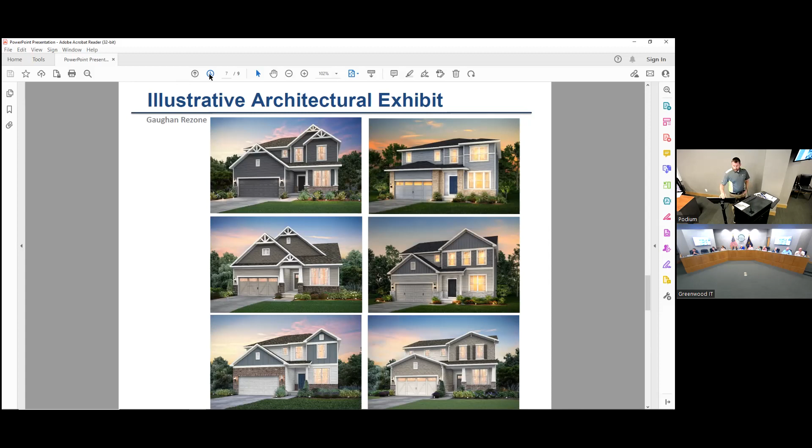The need for that design needed additional right-of-way from the McManuses. So we met with them, we've talked with them a handful of times, and had collectively determined that that's not the design that they wanted us to move forward with. So we spent some time trying to figure out what road improvements would look like if we didn't do that taper with the right-hand turn.

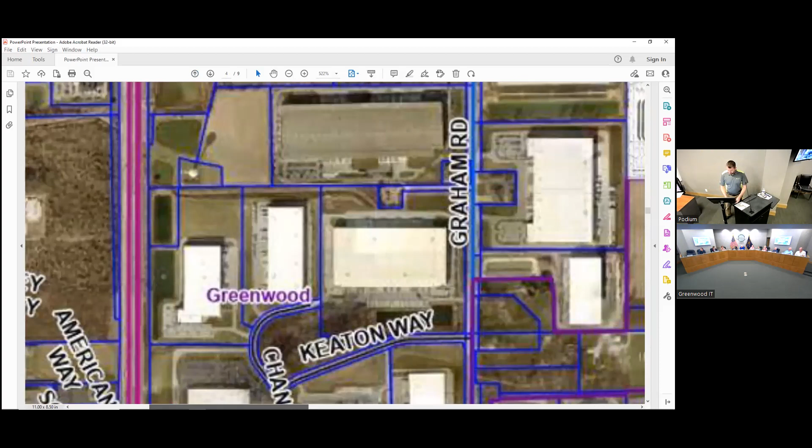So as you're coming northbound from Main Street, you would have one lane going northbound, which is typical what it is today. And then you'd have that, as I described earlier, that taper and then the deceleration lane to make a right-hand turn. You'd have that design aspect south of the Sagebriar entrance. And then coming out of the Sagebriar development to go northbound, instead of just having an angled taper, which is kind of just a triangular shape, essentially the additional pavement needed to carry that passing blister, that through traffic around, that's creating that second lane.

So to the south of the development, you'd have the two lanes continuing to go south that would funnel back into one. And then as you're going northbound, it would be a single lane with a dedicated right-hand turn.

So it's not a second through lane, it's an extension of that right turn lane into the Del Webb Sagebriar development. It's the right turn lane, and then our typical entrance standard requires a deceleration or acceleration taper when you come out of the development. And that kind of ran together, not very cleanly, with the passing blisters for the Gaughan development. So we ran it together as one big lane and basically just extended that taper out further.

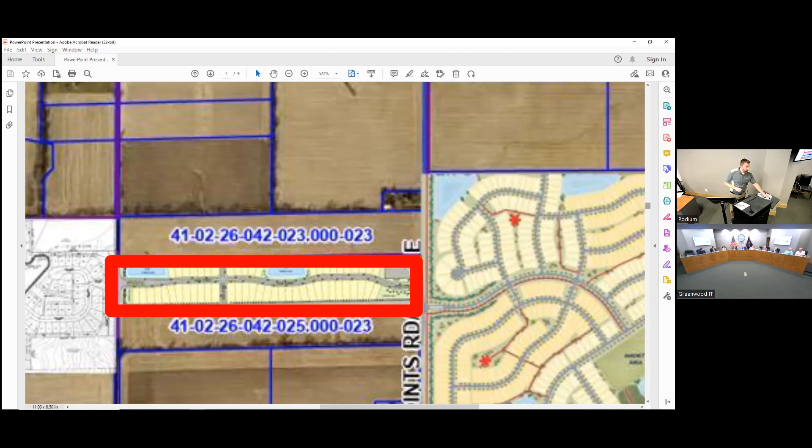I mean, to me, that's providing a bottleneck of traffic, huh? I don't think it will, because as you're coming northbound on 5 Points, there'll be a taper to get to Sagebriar, there'll be the right turn lane, and there'll be whatever the difference is between Sagebriar and Gaughan - I don't know offhand, maybe 200 something feet - and then the taper back to one lane of traffic. So there's no reason for through traffic to get into that outside lane unless they're passing a left turning vehicle or turning right to Sagebriar.

This is somewhat of a similar traffic situation as we have on Sheek Road in a few places. I can't think of any exact locations off the top of my head, but I'm sure other locations exist. Basically, our minimum entrance requirements would have kind of bled together into one, so we could clean it up somewhat.

Is there an issue with Sagebriar and the Gaughan properties not aligning? I think in an ideal world, they would align, or they'd be farther apart. I think with this proposed lane configuration, we kind of relieve those concerns. Because there's space to get around those left turning vehicles.

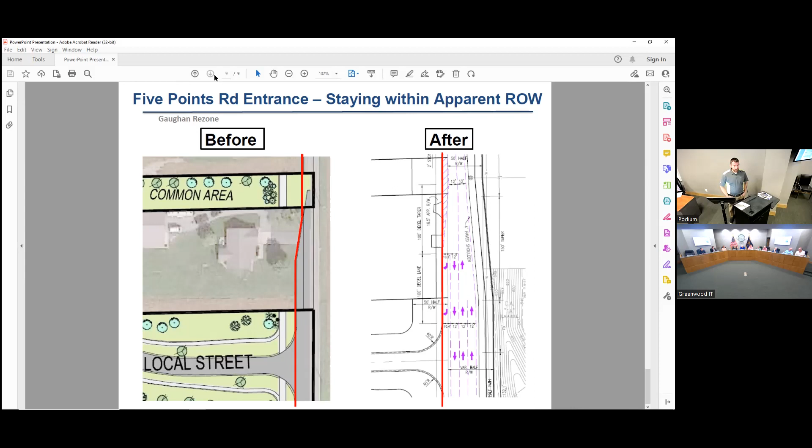That was my question. I noticed the development appears to be kind of in the middle of the field. I didn't know why that wouldn't be aligned with that other subdivision across the road. Maybe it's probably owned by different people. My understanding is they've been unable to acquire either parcel on the other side of that. Correct. So we call them the rectangular, or shotgun, long skinny rectangular tracks - there's three of them that were broken up.

Due to the cutout of the home that the McManuses live in, we can't really push it any further north. The entrance - we've tried to acquire the property both to the north and to the south, and for a variety of different reasons, it's not working out. So we did provide connectivity substreets to them if and when they do develop, but directly, there's no more space.

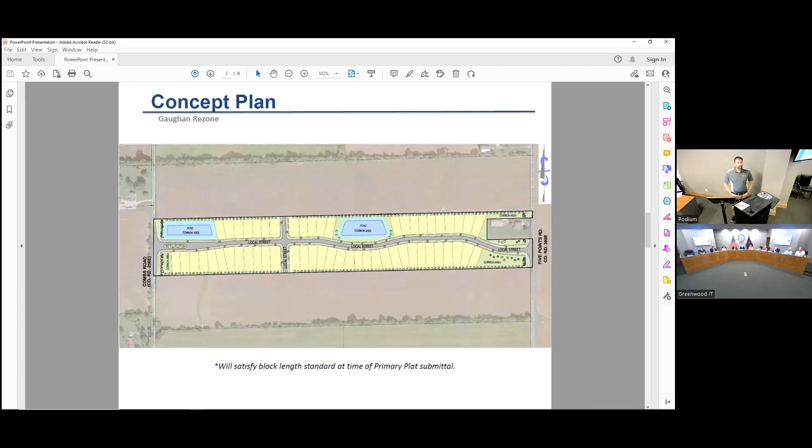So sewer is actually being brought over for Sagebriar through Ridgetop, which is the white development on the west side of Combs Road, through this development to get to 5 Points, ultimately east to 5 Points. So that's all a gravity sanitary sewer line. And then water is coming up 5 Points, and I fully expect that we would have to get that looped all the way through back to Combs Road.

So the project is somewhat of a necessity to keep utilities and extend them - you propose a subdivision and offset the cost that the utilities would make to pay. I wouldn't necessarily say it's a necessity, but we think it's a benefit to the city to be able to provide an extension of the gravity sewer, but then also closing the loop on the water just to make sure there's sufficient pressure. So you're improving utilities in the whole area. Yes, sir. Thank you.

Anybody else? Accept a motion.

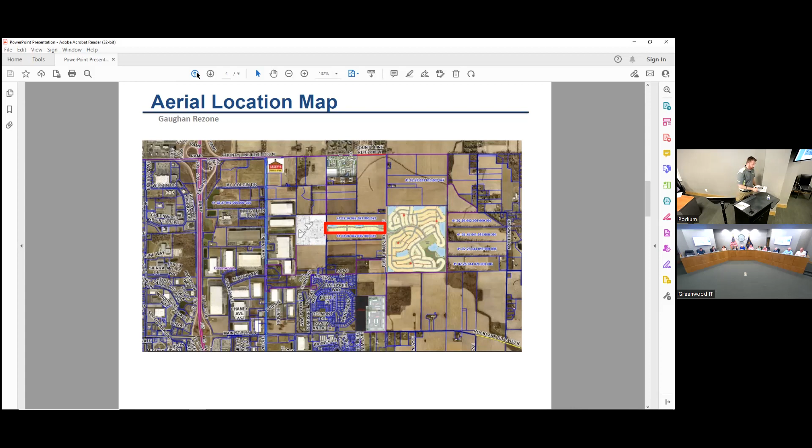Is there any old business from the floor? Seeing none. New business. Only new business that's on the agenda has been continued to August 28th. There is a waiver as well. Have a waiver? Oh, well, yeah, that's next on the agenda. Yes, you said the only other new business. Oh, perfect.

Other new business, PC 2023-042, Shiloh's Corner Landscape Waiver. This is not a public hearing. So, who do we have presenting? Derek Snyder with Crossroad Engineers.

Yeah, my name's Derek Snyder with Crossroad Engineers, 115 North 17th Avenue. Here on behalf of NJL Stones Crossing LLC to request a landscape waiver for the Shiloh Corner commercial subdivision.

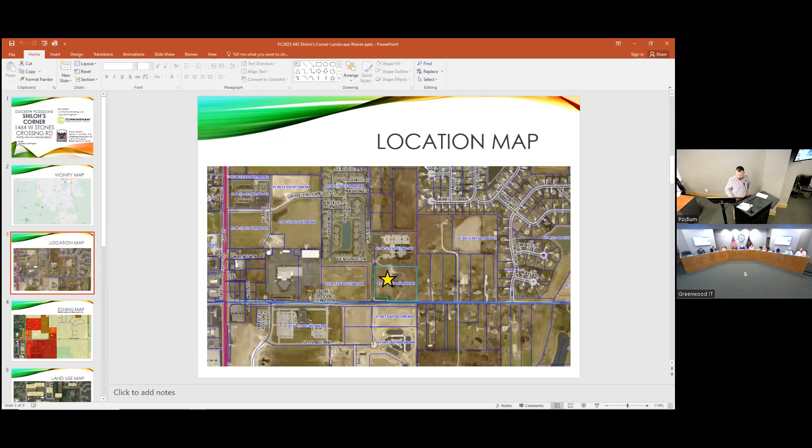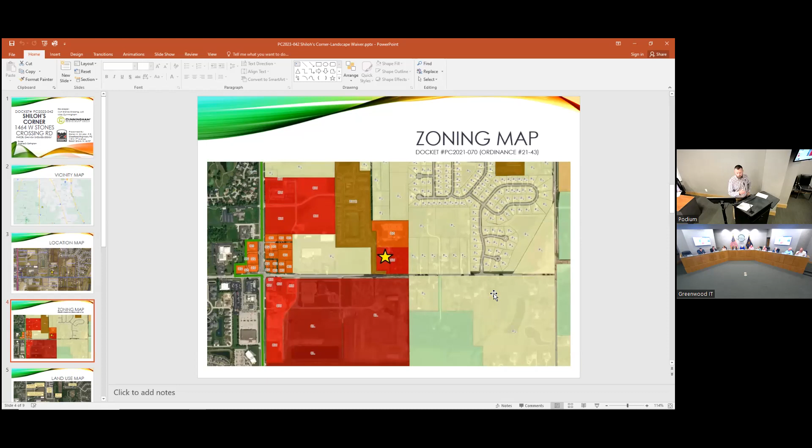So the project is located on Stones Crossing Road, the northeast corner of Galena and Stones Crossing. This is due south of the barn at Bay Horse Inn. It's zoned CM commercial medium, with commercial small located to the north, which is the barn at Bay Horse Inn, large residential to the east, large commercial to the south, which is Swartz Crossing, and then two residential zoning districts to the west. As I said, the property is located south of the barn at Bay Horse Inn, on the north side of Stones Crossing.

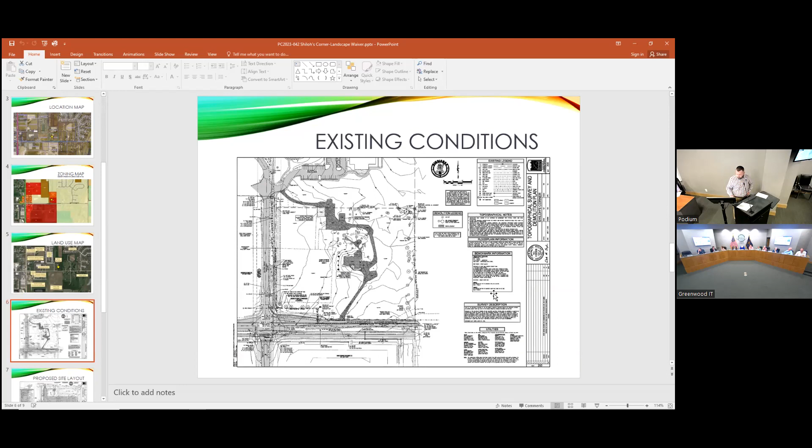The site layout, the landscape plan - this is the exhibit that Mr. Nelson was alluding to. So the request before you is to allow the buffer yard plantings that would be required about the west side of the property to be planted around the detention pond instead.

We have some site constraints, including two water lines along the western property line of the property that come off the water main on Stones Crossing and extend up into the barn at Bay Horse Inn. Those water lines are the domestic and fire suppression system lines for the barn, and the intent is to leave those in place. As such, we're limited in the space we'd typically have for planting, but we don't want to put the trees too close to those water lines and crowd it. So the thought is we can move them into more open space by the pond, providing a better growing environment.

And with that, the request of waiver has come to the board. We appreciate staff's favorable recommendation, and we're happy to answer any questions you might have.

There's ample existing foliage on that west side currently, correct? Yeah, correct. So Galena is actually a private street, and there are several large existing pine trees on the adjoiner's property, but the way we've laid out the site, other than our drive connection, all those trees are to remain, and we're planting more trees in that red area - I think a dozen or more trees. The remainder of the trees will be planted near the pond.

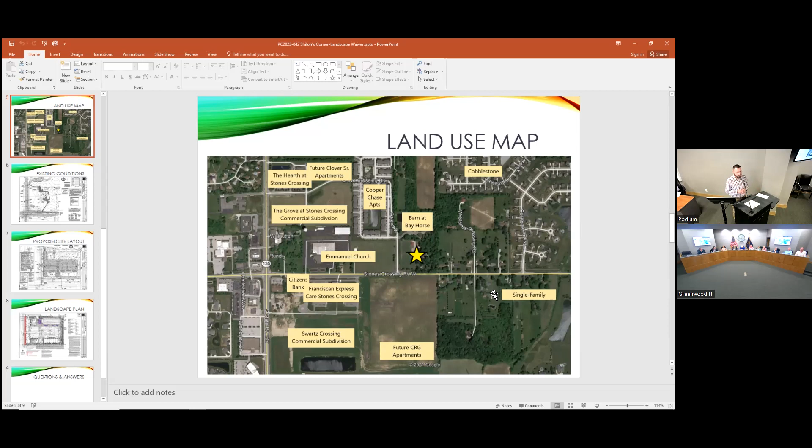In terms of, I know it's kind of difficult to see on that exhibit, I believe there's 20 or so existing trees. And then we're planting another, I think, a dozen or so, plus the shrubs that are required, and then the remainder of those trees that would be crammed in there, for lack of a better word, are being planted over by the detention pond.

Can you identify the land uses, the uses of the building on the proposed design? The two far western uses are full service restaurant, and then the building in the southeast corner is a multi-tenant retail. Thank you. You're welcome.

Any other questions? If not, accept a motion.

Mr. President, I move that the request of Amanda Cottingham Johnson for a waiver of the requirements of the Unified Development Ordinance, Greenwood Municipal Code, Chapter 10, Article 25, Division 3, Generally Applicable Regulations, Section 10-03-06, Landscaping and Buffering, Item 1, buffering that specifies a minimum 30-foot medium-sized buffer yard where differing districts and zones abut, to allow a portion of the required buffer landscape plantings along the west boundary where the CM property abuts RMC property to be relocated to the west and south sides of the proposed detention pond due to space and topographical constraints be approved, and that the Plan Commission find that Johnson has met the criteria set forth by Greenwood Municipal Code, Section 10-04-03K for the waiver for the reasons set forth in its request for the waiver and as presented.

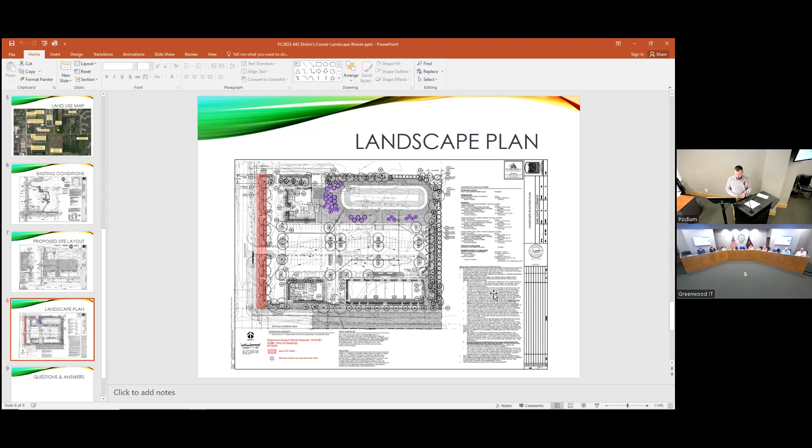Is there any new business from the floor? Since we're the only one left, my name is Rebecca Summers. Would you actually like to speak to us? Here, absolutely.

My name is Rebecca Summers, and I live at 3045 Meridian Meadows Road in Greenwood, Indiana. And I was actually here for the PC 2023-28 FTMT primary plat. And I know that has a continuance, so there's not really much that can be said.

My only issue that I have is that I had some issues with the traffic flow. And I can no longer be here on the 28th because I'm having major surgery, and that's when it's being continued to. Is there someone who can speak for you? Well, I'm working on that, okay, but this should be addressed after hearings.

Right, so my question would be, do I have to give this that came from the Seymour Department of Transportation? I didn't know if this is something that the commission would like to have in advance, or if this is something that whoever speaks on my behalf brings it back.

You can provide any documents that are presented, or remonstrations, or letters of support, to staff. If you just put your name and address, it can be an email, it can be a handwritten letter, we will read those into the record for the public hearing at the meeting. You can also attend virtually over Zoom, if that's an option. I know sometimes people can't be here, but they can still attend virtually.